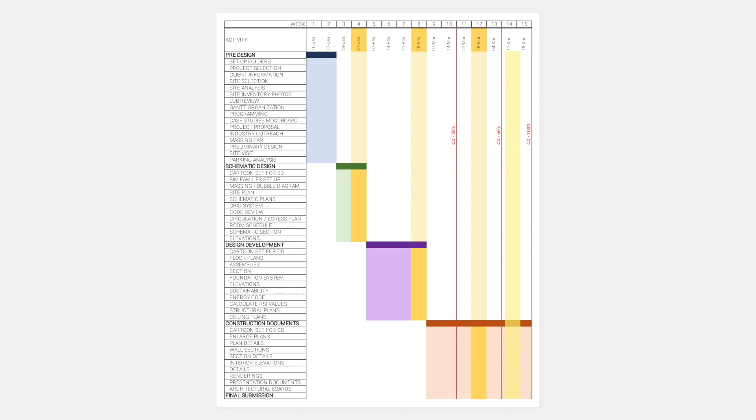From the onset, the aim of this project was to propose a building that will be functional, sustainable, and timeless. In terms of functionality, we wanted a building that would provide complementary facilities, as well as serve as a hub to integrate all users on site.

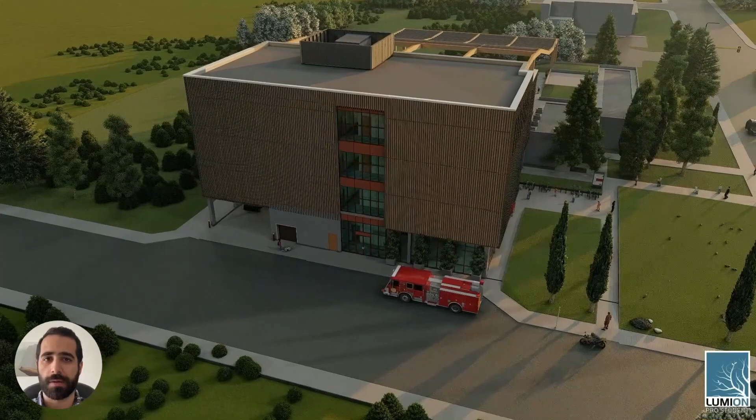A unique center like this is necessary because of the impact of the current global pandemic on the mental and physical health of both adults and kids, which has created a lot of demand for activities that enhance the well-being of the mind, body and spirit.

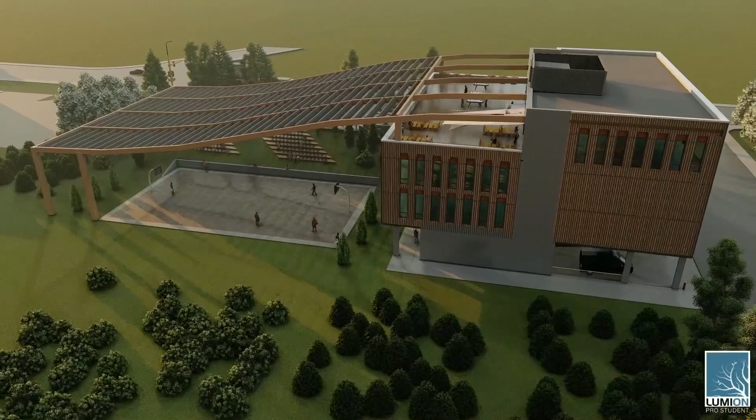For sustainability, we set out seeking to retain as much as possible the look and feel of the park, thereby minimizing the adverse environmental effects this project would have.

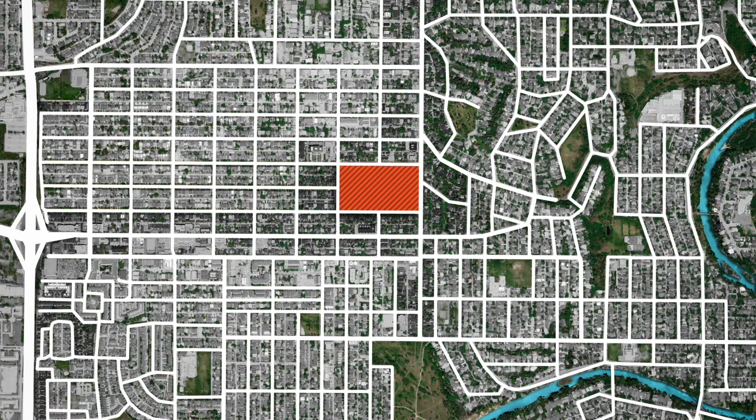The South Calgary location was chosen because of the proximity to the downtown core, which was one of our sustainable site goals, but also sufficiently far away to allow for a conducive environment to study, recreate, and relax. Other reasons were the ease of accessibility through 14th Street and the appropriate land use designation of the site.

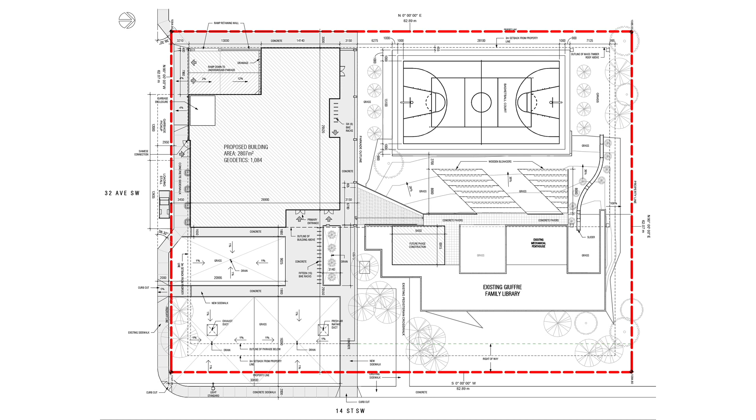So this project will be a small-scale building. It will exhaustively address issues of design, adequate program requirements, construction systems, and material science.

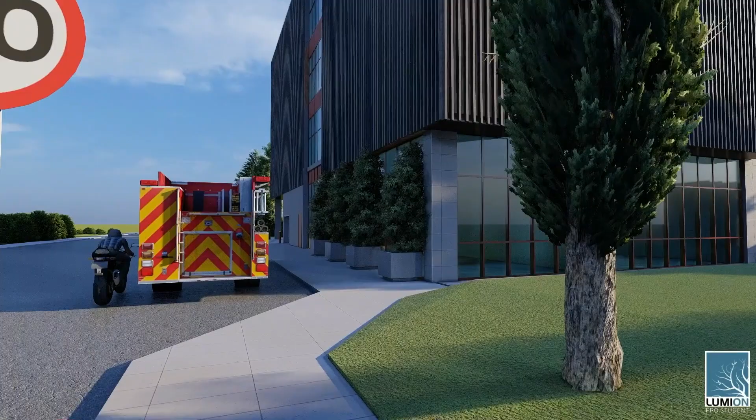Because this building shares a parcel with other publicly owned facilities, access to our proposed building is public, making it easy to provide vehicular, bicycle, pedestrian, garbage retrieval, loading, and barrier-free entrances.

This mixed-use scheme is expected to expand the existing recreational facility and library with a functional, sustainable, and timeless development while meeting the local needs of the community.

Our east-facing parcel was relatively flat with 2.4 meter high deviation across the site. The existing library on the parcel had a unique architectural feature: it was nestled into a hill, allowing users to walk right up its roof from the park.

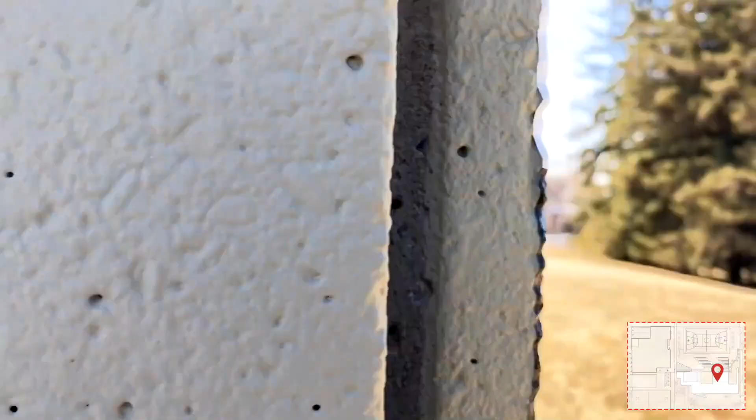Ultimately, the goal of this project is to connect with the community, be aesthetically pleasing, and integrate well with the existing facilities on site. We retain the hill behind the library, we preserve most trees on site, and replace the existing surface parking with green spaces.

In order to retain the library and its unique landscape on the back, we decided to provide a set of bleachers to make use of it. On the flat end, we provided an outdoor basketball court so it can be integrated well with the park.

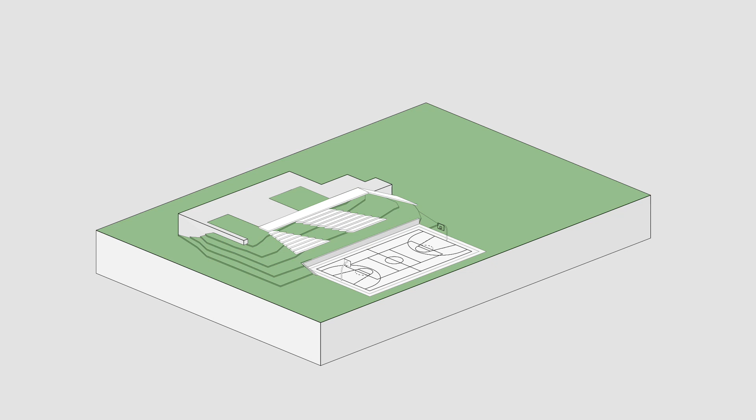For the recreational center, we chose to build on the north side of the site, having 4 floors and 2 levels of parkade. On the 4th floor, we provided an outdoor terrace with a view to the park and the basketball court. We recessed the main floor in order to create a continuous connection from 14th Street to the park.

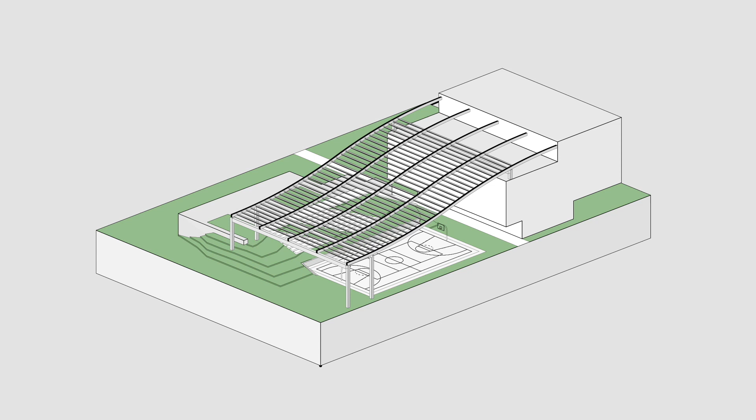We also provided louvers above the basketball court attached to the mass timber beams, allowing us to provide longer spans.

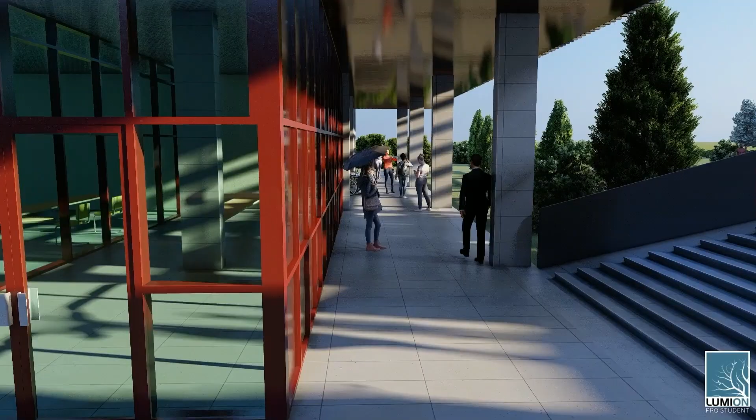By creating a direct hub from 14th Street to the park, we have direct access to the main entrance of the recreational center. On the north side of the site, we have access to the rooftop of the library, which also allows users to be on the bleachers as well.

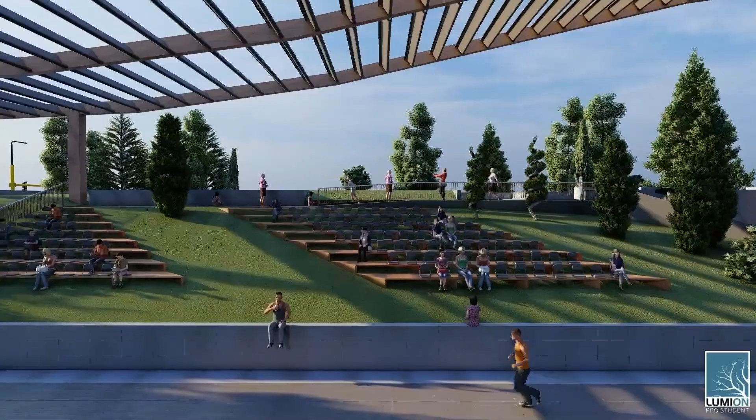We decided to provide a retaining wall right on the edge of the basketball court in order to preserve the landscape. From the bleachers, we have the perfect slope to satisfy the general view we're looking for.

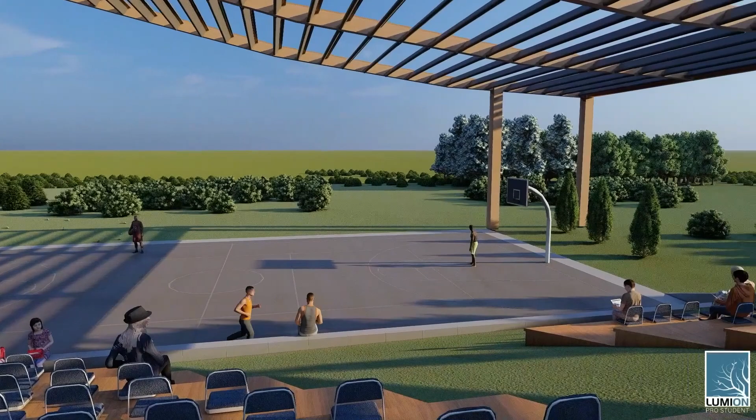We calculated the necessary isoptics to provide the spectator with full visibility of any event from any point of the stands. Parkade 2 and 1 were typical.

2 levels of underground parking, centralized stairs, elevator shafts, and so on were provided in each. The parking stalls were laid out along the perimeter of the parkade to make the best use of space and column positions. We also provided a total of 49 regular parking stalls, 4 barrier-free stalls, as well as mechanical and electrical rooms.

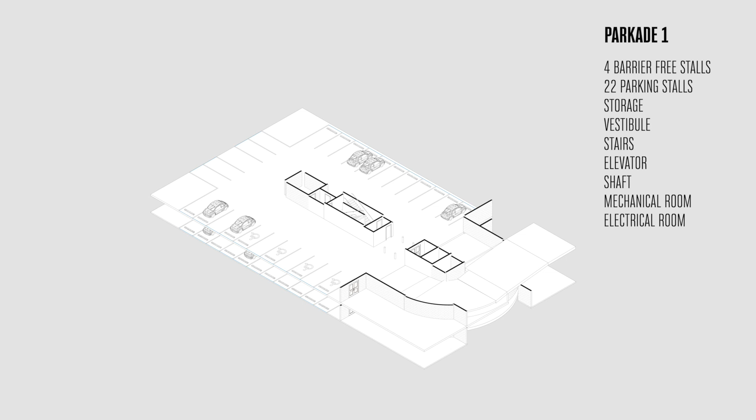On the main floor, we provided 2 vestibules, exits, administrative offices, access to the parkade, washrooms, as well as vertical connections to other floors.

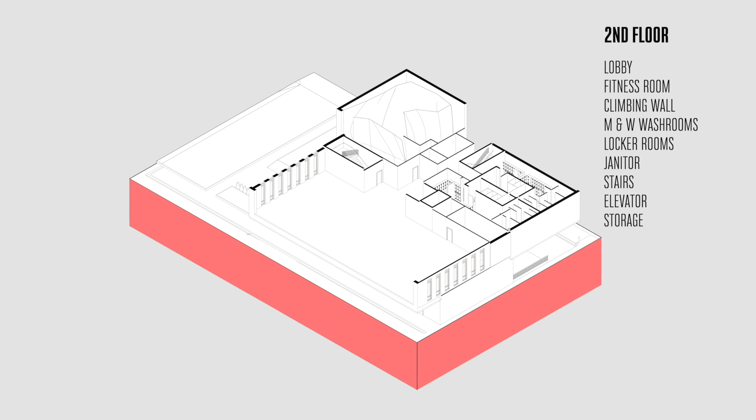On the 2nd floor, we have integrated all the recreational uses in order to effectively divide all the designated uses from the main floor, starting with the fitness room, a set of lockers, and an 8-meter height climbing wall. Continuing on the 3rd floor, by the proportionate double height, another level of fitness room and lockers.

Ending with the space of administrative offices. On the fourth floor, we adapted the space for the yoga studio and the meeting room, which in turn are connected to the terrace and the cafeteria with overlooks to the park and the basketball court.

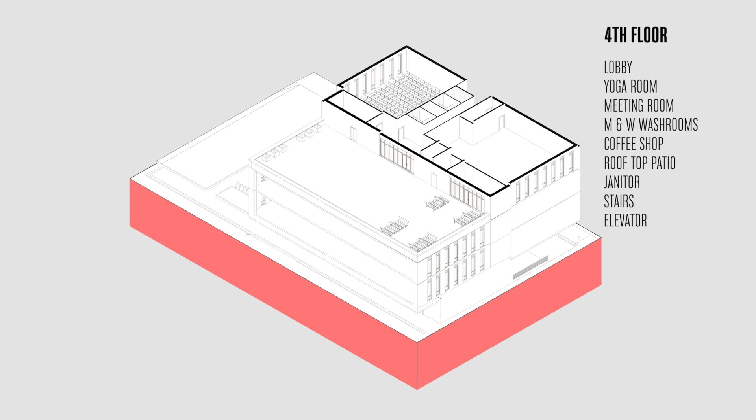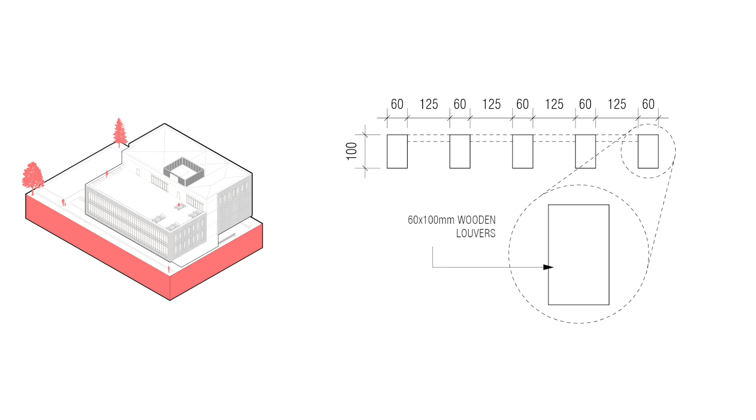The facade materials were carefully chosen to integrate well with the surrounding building. The envelope is wrapped by 60 by 100 mm wooden louvers, attached to our rain screen wall system with our final layer. The roof louvers were specifically designed at a 45-degree angle in order to provide only indirect sunlight.

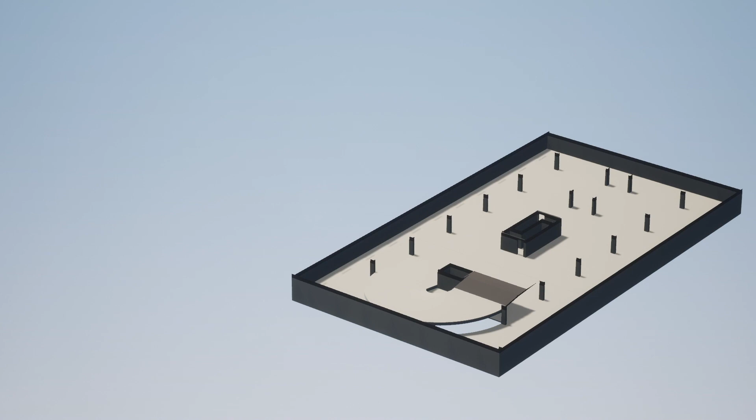One of the reasons we chose concrete and mass timber for our construction is because we wanted to expand our knowledge, having gotten experience in wood and steel construction from previous semesters. Another reason is that we wanted a low maintenance system that was durable and strong.

Considering this building's use and the various activities happening within it, like fitness training, climbing walls, and so on, we knew that concrete would be ideal to provide the required sound transmission class as well as the fire resistance rating required for a building of this size.

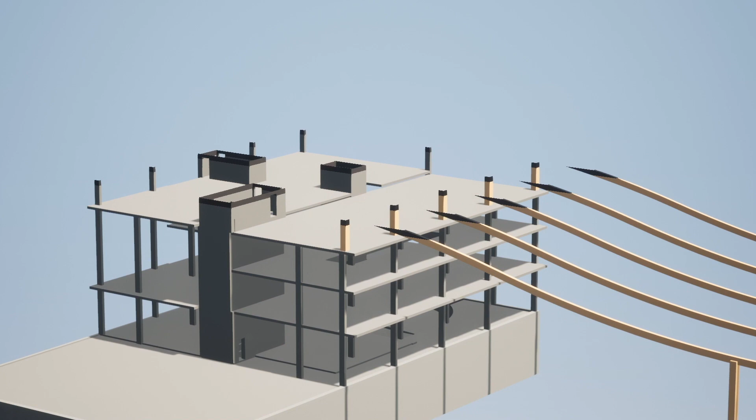At the same time, the mass timber beams land above the fourth floor of the building, integrating the whole structure and perfectly merging everything into one. This perspective section gives a better understanding of how the mass timber beams land above the concrete structure.

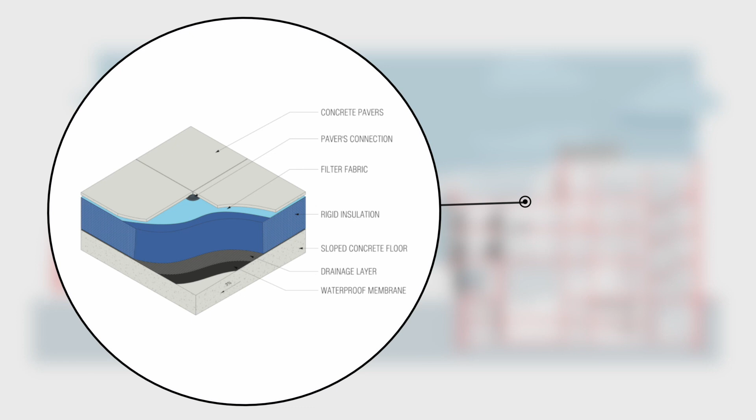For our exterior terrace, we decided to provide an inverted roof system. We sloped the concrete slab by 3%, followed by the typical waterproof membrane and drainage layer, just before our rigid insulation, allowing us to use concrete pavers on top, leveled by the paver's connections.

For our soffit, we provided steel studs attached to the concrete structure, followed by a rigid insulation layer with a finished face of wood-look Prodema Parklex on both sides, allowing us to extend the wooden louvers 150 mm to meet the metal flashing at the intersection.

For our parapet wall, we decided to make it out of OSB sheathing and steel studs. By doing this, we could provide batt insulation on the inside and make it lighter. The parapet wall is supported by a 300 by 600 mm mass timber glulam beam, which in turn rests on...

the basketball court roof beam. Everything rests on the structural concrete column.

In this section, we can appreciate how our parkade extends to the limit of our property line, thus allowing us to have a greater number of parking spaces.

On the other hand, we have a combination of scissor stairs in the parkade, while from the main floor it becomes a single stair to the top floor.

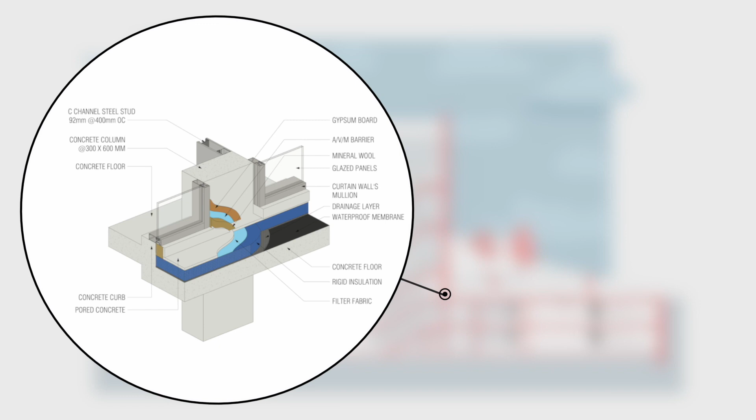Here we can see how our plaza deck connects with our curtain wall system, raised by 100 mm by a concrete curb, meeting a concrete column in the center, with mineral wool insulation and 1 inch of concrete panel finish, plus 1 inch of air for our rain screen system, supported by Cascadia clips.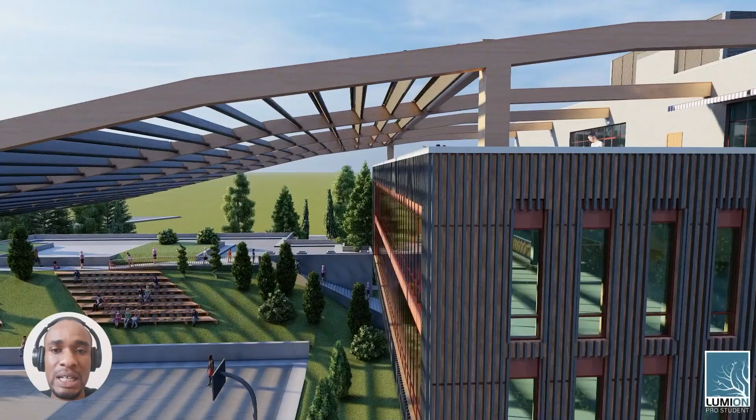In order to establish a visual connection between the interior of our building and the park, we provided large curtain walls on the north face of our building, as well as a rooftop patio on the fourth floor.

The large curtain wall provided desirable views from the fitness room into the park, as well as into the outdoor basketball court and the bleachers on the hill behind the Geoffrey Family Library.

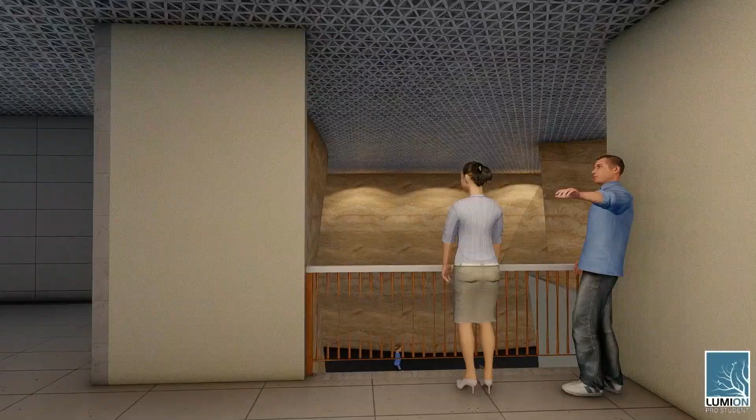The fitness room was designed with a void to allow for visual interconnection between both fitness floors. Our 8-meter high indoor climbing wall was built of aluminum construction.

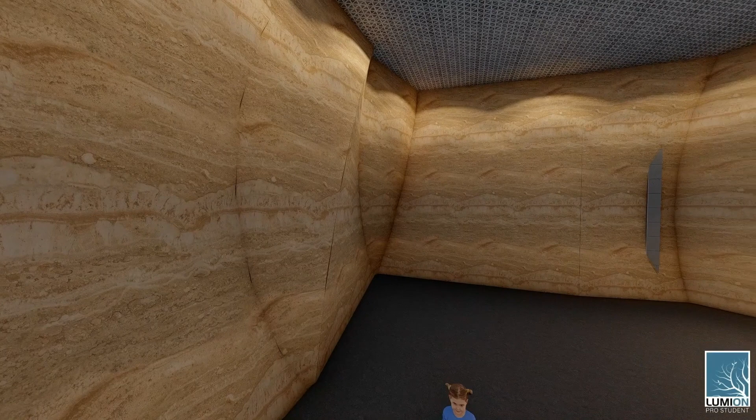The finished surface of the wall was made of plywood covered with a textured surface. A polyethylene foam crash pad was laid on the floor of this room to absorb shock and provide safety for users of the climbing wall.